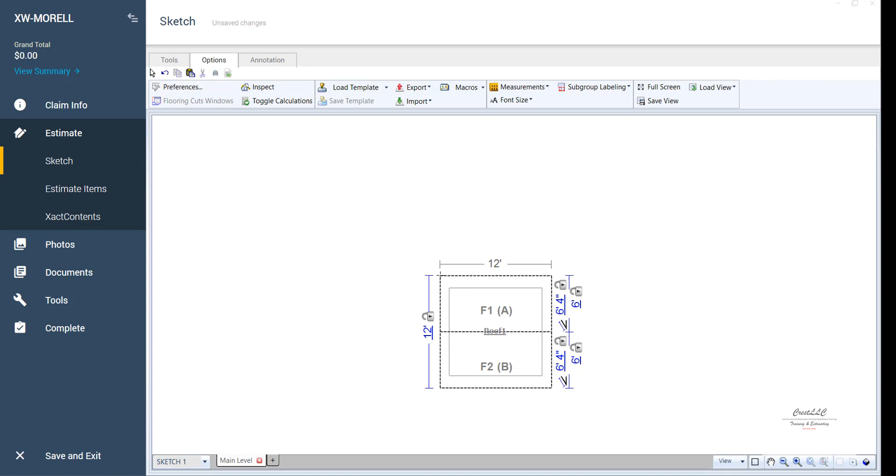So the first thing I'm going to do is hit my F key. If you want to follow along, this is a good exercise for you. So we had a Dutch hip in the front and a hip in the back. I'm going to hit the F key, and I started to rotate it, which I probably need to do. I'm going to hit the tab key till I get to my Dutch hip. There's partial hip, there's my Dutch hip right there.

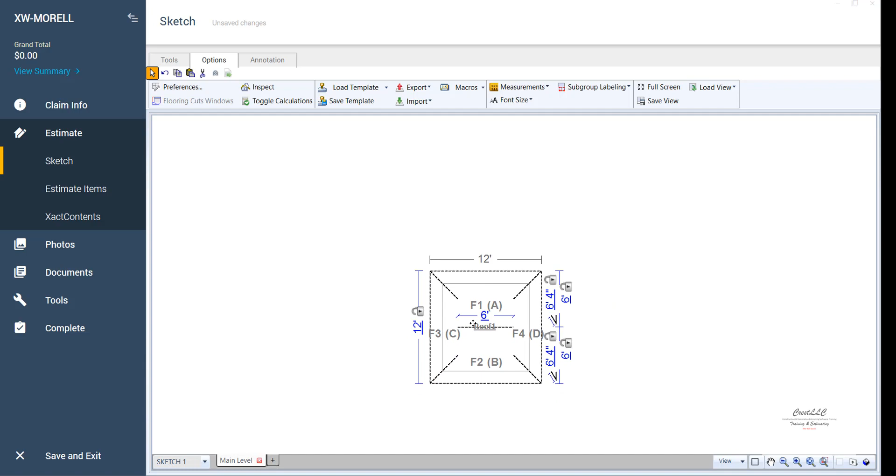So I'm going to go ahead and put it down because it's hard to tell which way is the Dutch, and I can see that I need to rotate it. So I'm going to rotate it like that. And now when I go into my properties, you'll notice I can change one end, but when you change one end, it changes it to a gable. It won't let me put a hip in the back here.

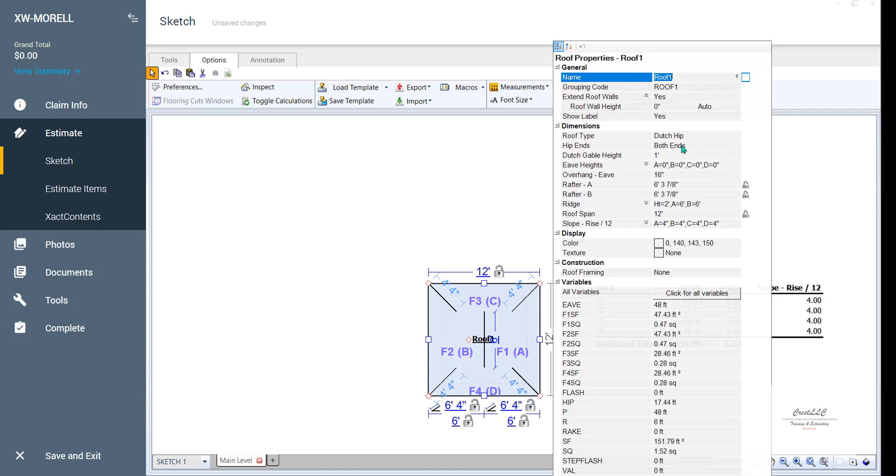So what I'm going to do is tell it to leave the Dutch hip in the front on the D side. You can see it says D right there. So instead of saying give me a Dutch hip on both ends, I'm going to say just give me a Dutch hip on the D end only. And you'll notice how it doesn't let me change the back to a hip. So I've got a Dutch hip with a gable.

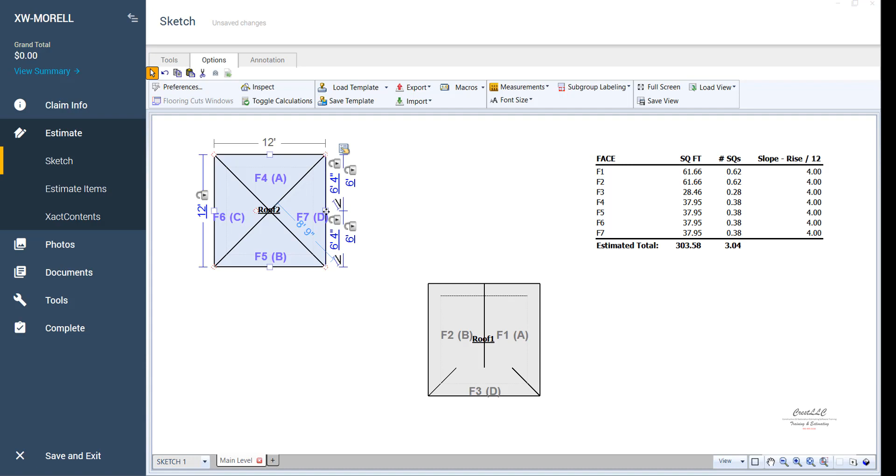So what I'm going to do is put out another roof there. I'm going to go to a hip, and put it down. Remember, you always want to create your hip roofs with the ridge running from left to right so that you don't get that error message. We went over that in one of my previous videos in the level 2. So we're going to pull this right just so that our ridge runs horizontally.

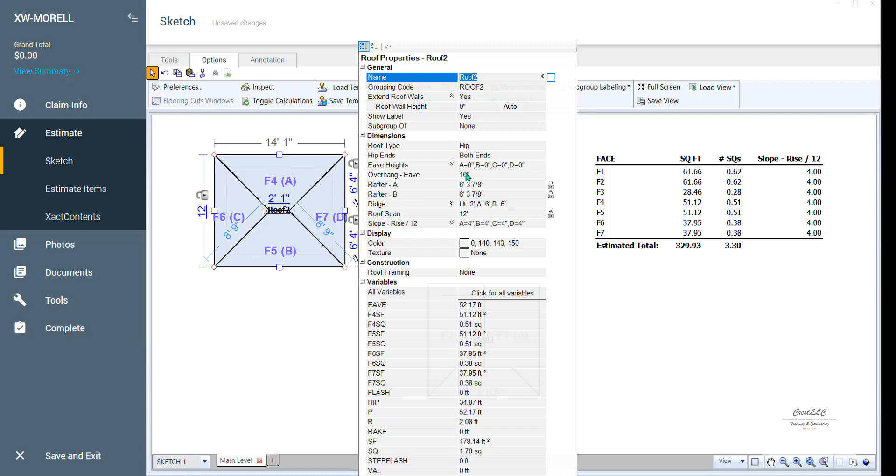And then we're going to again change one side to a gable. So we're going to double click here, and say just leave my, let's say the D end, as a hip. There we go. And now we've got our hip in the back. And now we can combine the two.

So I'm going to click this and make it a little shorter so it fits on the screen there. I'm going to rotate it, going counterclockwise, so I'm going to hit my Shift Tab. And then I'm going to put them together.

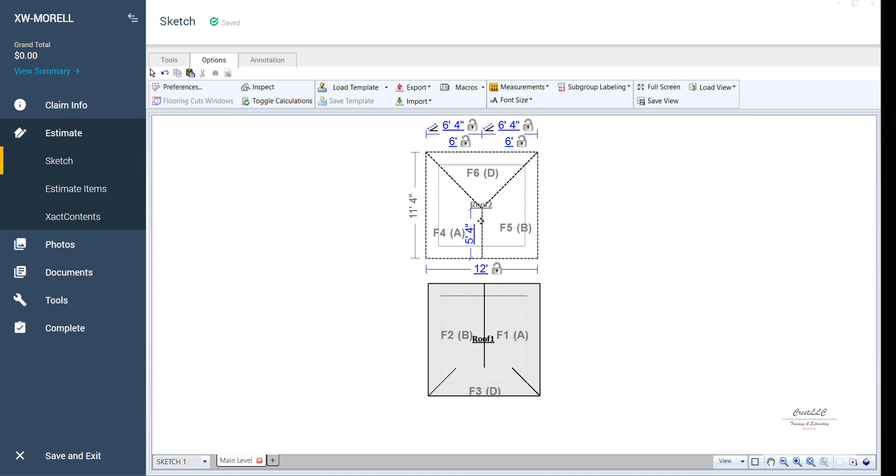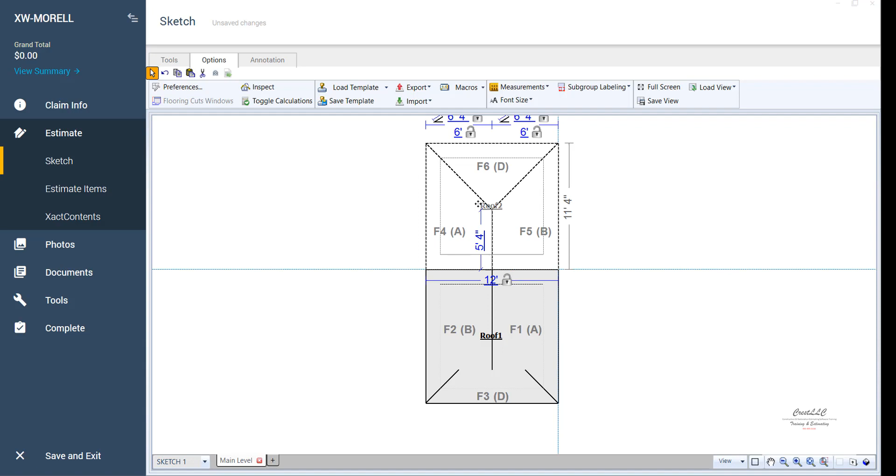And this is a place where you could use that snap line we learned how to use a little while ago. If you hit the S key for our snap line and you zoom in and put that both snap lines right there, see how it snapped right to that corner? Now when I grab this one, it's going to snap right there horizontally and vertically, right there to make one roof. Then I'm going to click on the snap line.

I'm going to delete it, click here. I'm going to get rid of my two overhangs, because not that it really affects anything—you could leave them that way, but it looks nicer if the overhangs are gone.

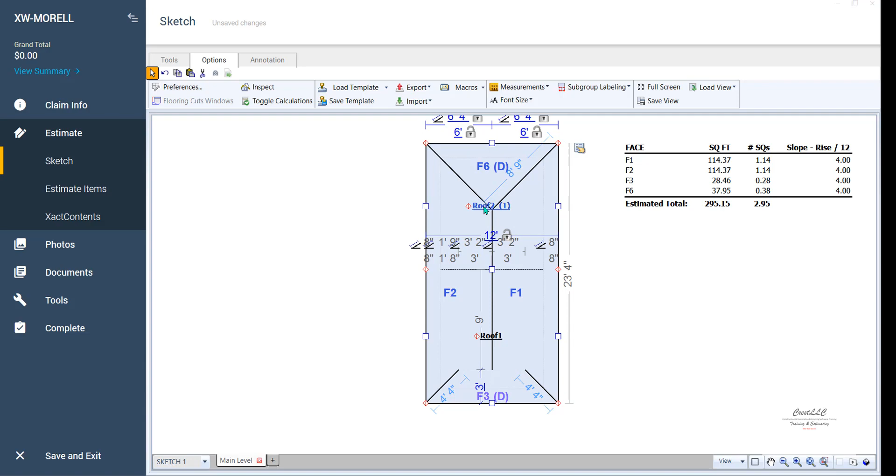And now you take and make one room a subgroup of the other. So I'm going to hit my Control-Shift-C, my shortcut for making a subgroup, and notice it made the back a subgroup here. So now I can double click on there and say hide that label.

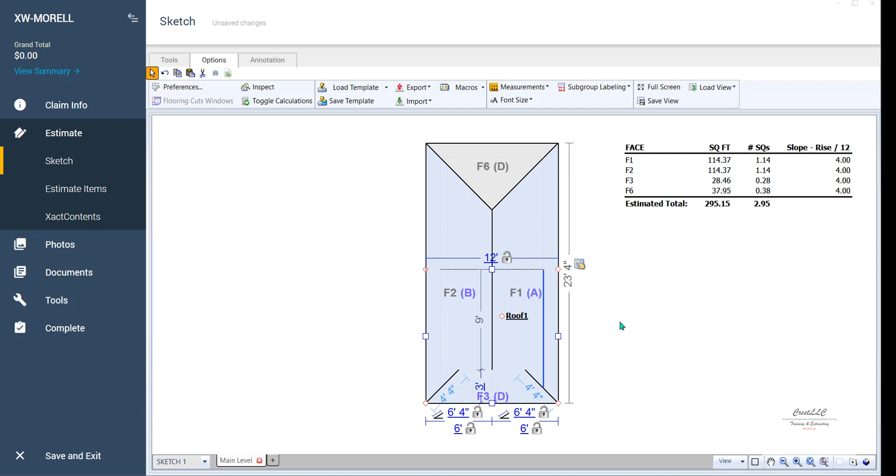Click out of it. I probably want to move my label there, center it a little bit. So I'm going to hover my mouse over the diamond, hit the space bar. Once it turns green, I can move it to where I like. And now I've got two roofs that I turned into one because it's what I needed—I've got my Dutch hip in the front and my hip in the back.

So if you can come up with something that you need that Xactimate won't do, see if it can be broken up into parts, and then just put the parts together.

Now, someone in the comments down below mentioned that they can see the line of the edges of the roofs. He wrote, I've done this, but when I print it, it shows the edges of the two roofs in the sketch report where it does not show in the Sketcher in 3D. I assume he's talking about this line right here, which you can see in the report. You don't really see it in 3D because it's basically one roof.

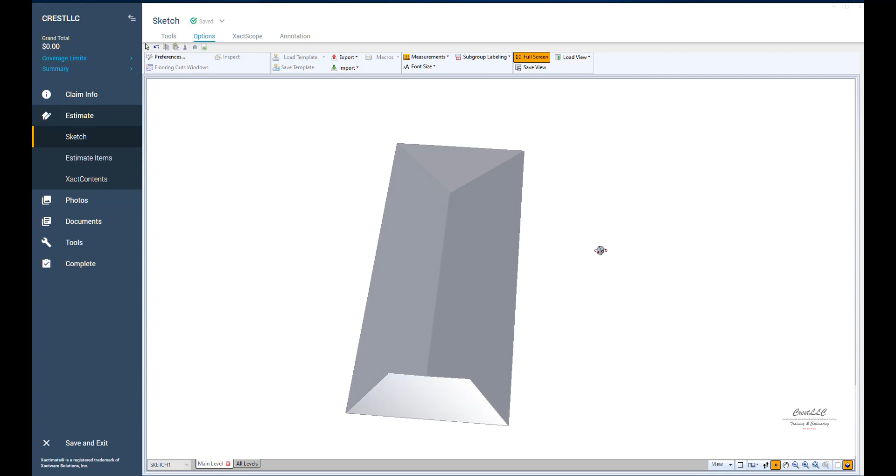Now, if you've drawn it this way, even though you see that line in the report, your calculations here are correct, so that shouldn't matter, but I want to show you what he's talking about and why it's doing it. If I go to the report, I assume he's talking about this line right here.

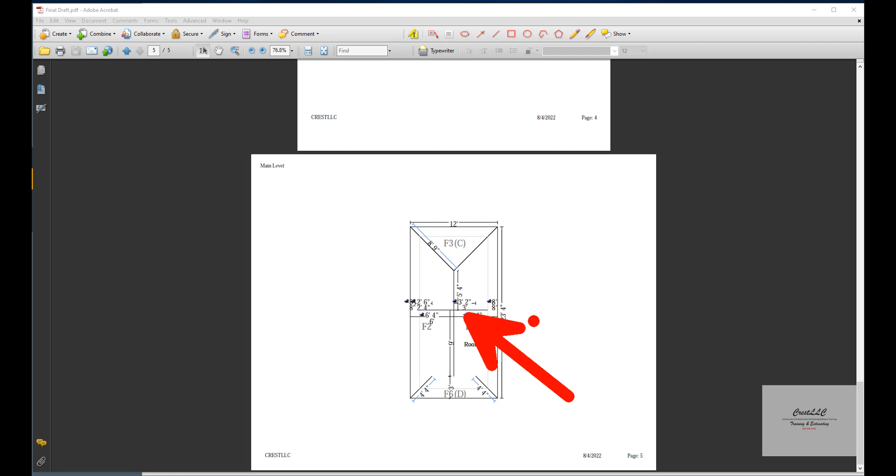And that's the edges of the two roofs. I don't think there's any way to avoid that, but the roof is accurate, the quantities are accurate. I'm going to show you why that line's there. That line really is always there. It's always showing the back of the roof. The reason you don't notice it in other drawings, well, I'm going to show you instead of tell you.

When you draw a roof, I'm just going to take another roof here. I want to delete this one, and I'm just going to draw a simple gable roof here, and put an overbuild right here in the middle.

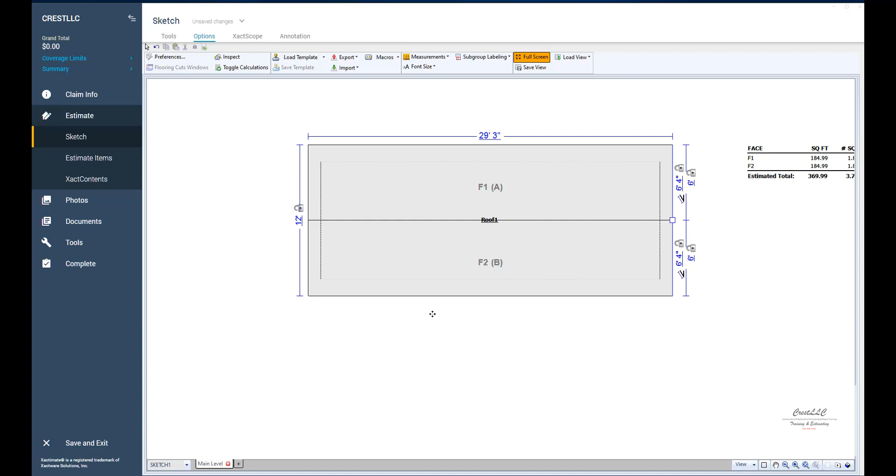So I'm going to break it, click and drag, and create an overbuild there. I want you to notice where the roof is starting. The new overbuild starts up at the ridge. So when I let go, the roof really started right up here. The reason you don't see that faint line is because it's hidden up under that ridge.

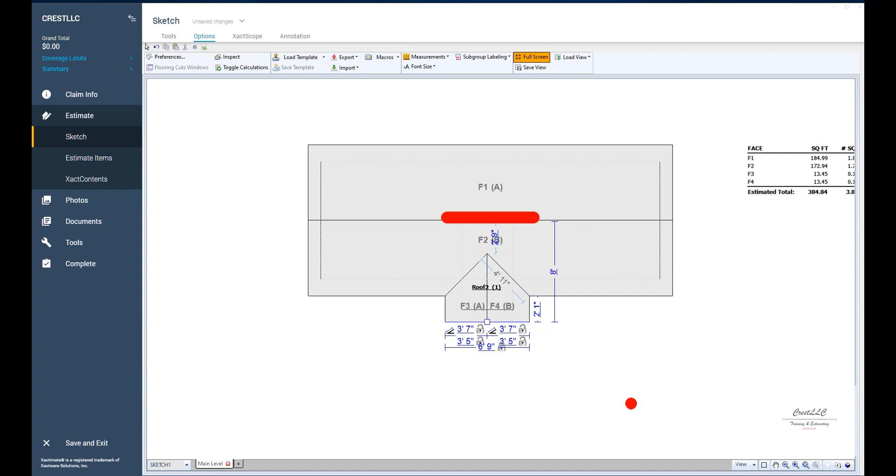Just to prove that, I'll show you, when I click on the roof, notice 3 of the 4 handles are not even inside that little roof. There's one, there's one, there's one, and here's one. And that's because this roof actually does go all the way to the ridge there.

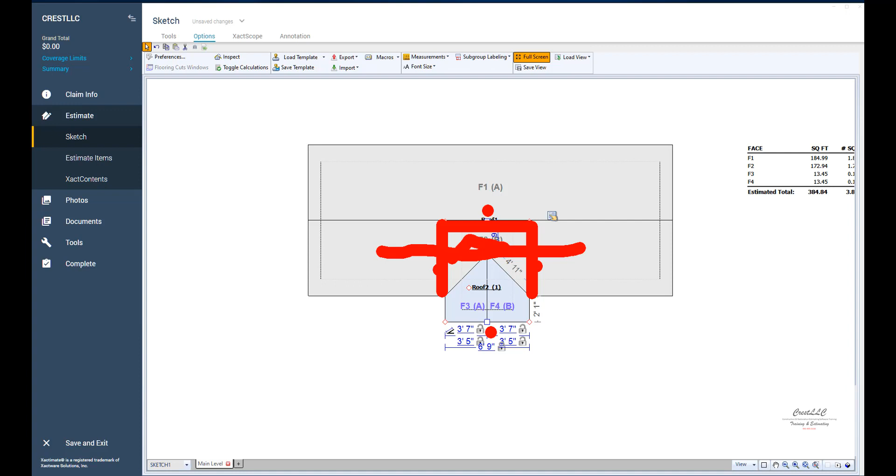Just pretend like this part of that little roof is hidden up under this one. But watch, if I take that top handle and I pull it down, notice the size of the overbuild doesn't change.

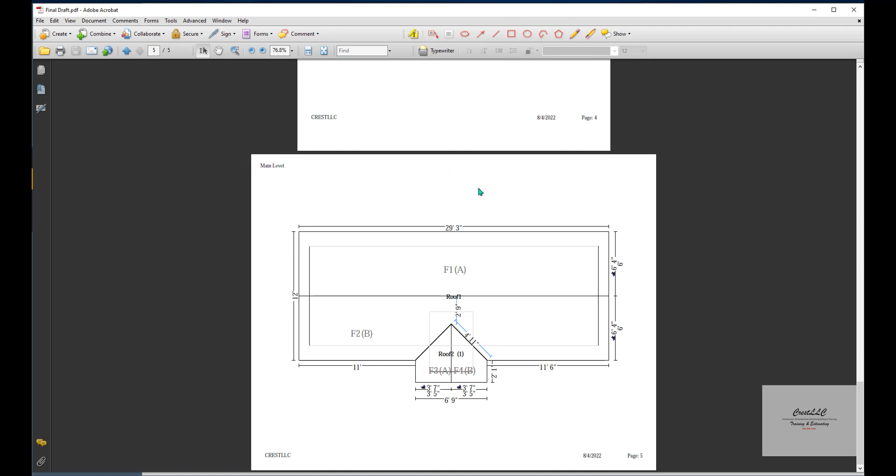But now there's a line here that you're not going to see here on this drawing, but you're going to see it on the report. If I go to the report and scroll down to the sketch, you see the faint line right there? Normally you don't see that faint line because it's hidden up under this one. So you're always going to see the back of wherever that overbuild is, or another roof.

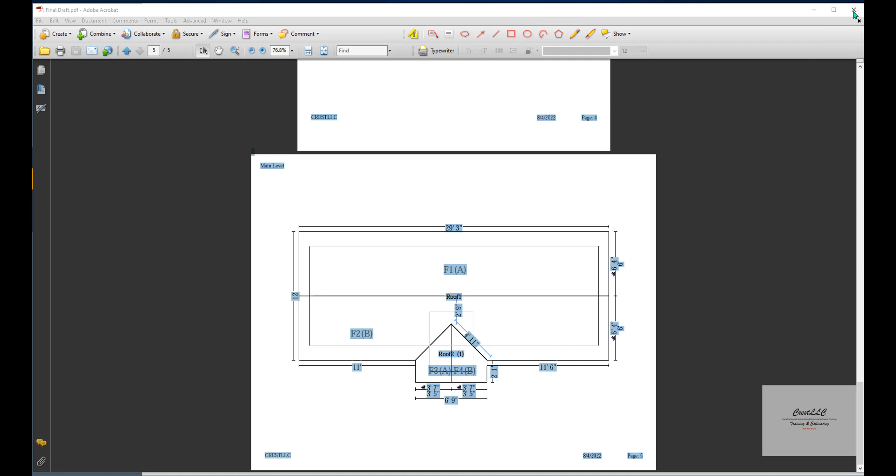So hopefully that explains what he was asking about. Now there is another way to draw this roof, and I'll show you how to do that, but you're still going to get the same effect. I'm going to erase this roof here, and draw that other roof that we were talking about.

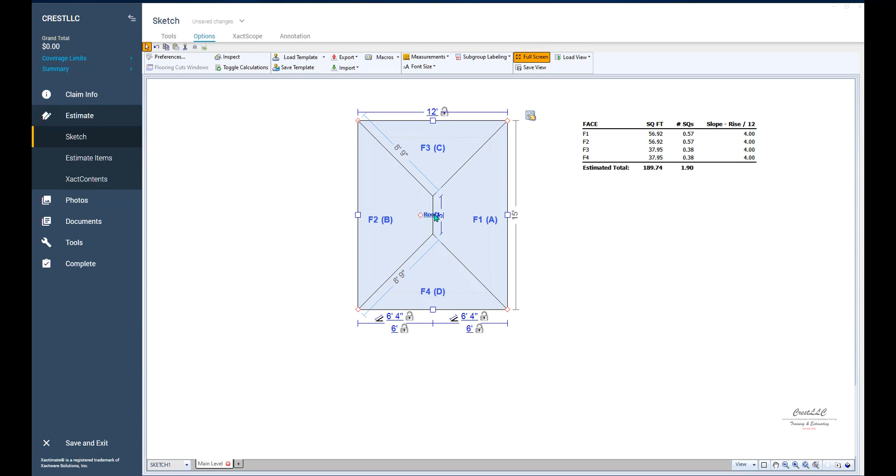So what you do is you just draw a hip roof. And you always want the hip with the ridge running left to right so you don't get that error message. So I'm going to click on it and rotate it, then open up the properties just like I did before, and tell it just to make the hip on the C end.

I'm going to get rid of the overhang down here, and then break this. Now I want you to be careful, because whenever you create, like for example, when I was creating this separately, and I'll do that here, I'll show you real quick.

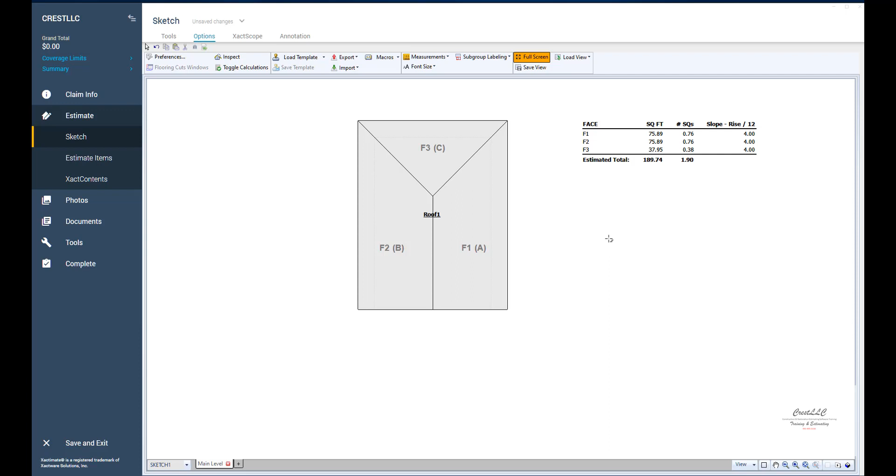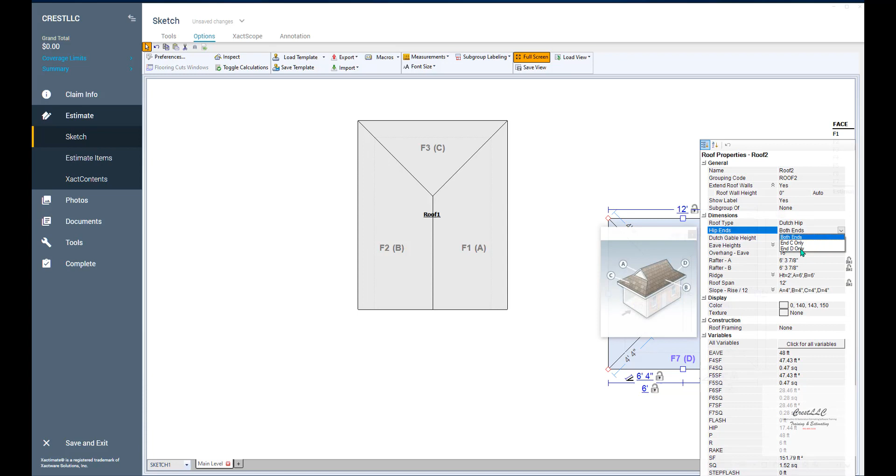When I created it separately, I created a Dutch hip, and then I rotated it, and then said to just make it the D end only. Let me move this over so you can see it a little bit better. So this is, and then I just connected these two.

Now there is another way to do that, but you kind of have to be careful, because once you create the roof, your Dutch hip, if you look here in the properties, this Dutch gable height does not change. So right now this one's at 1 foot.

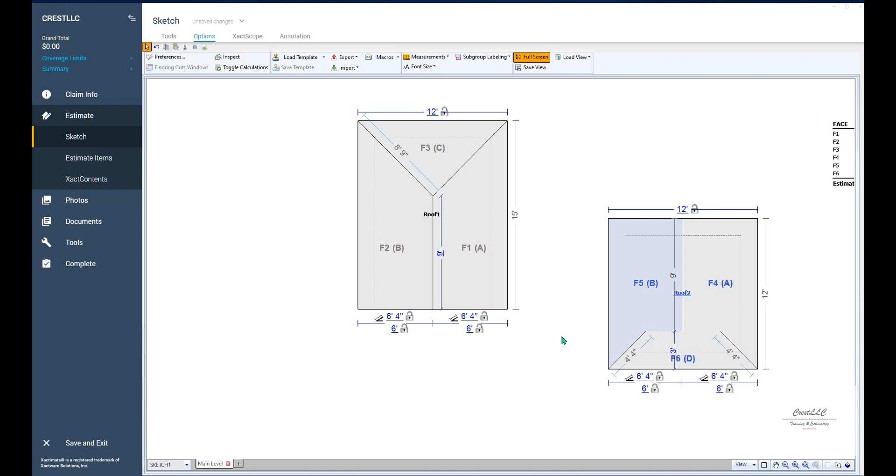So let's say that I come over here and break this anywhere, then hold down my control key and pull that down and create another roof right off of there. I want to change that roof to a Dutch hip. This is another way where you don't have to add on a roof. I'm going to change it to Dutch hip.

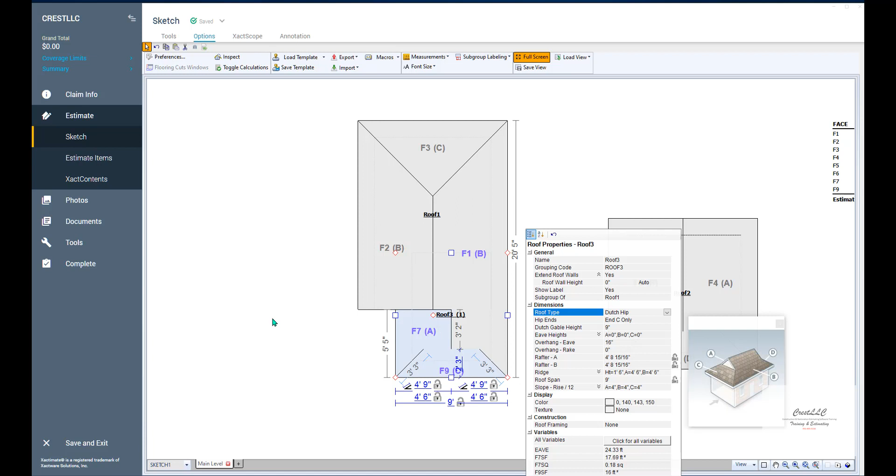But notice my gable height is 9 inches. Now when I expand it so that it's the same size as the other one, let's take a look at that Dutch hip. It stayed 9 inches.

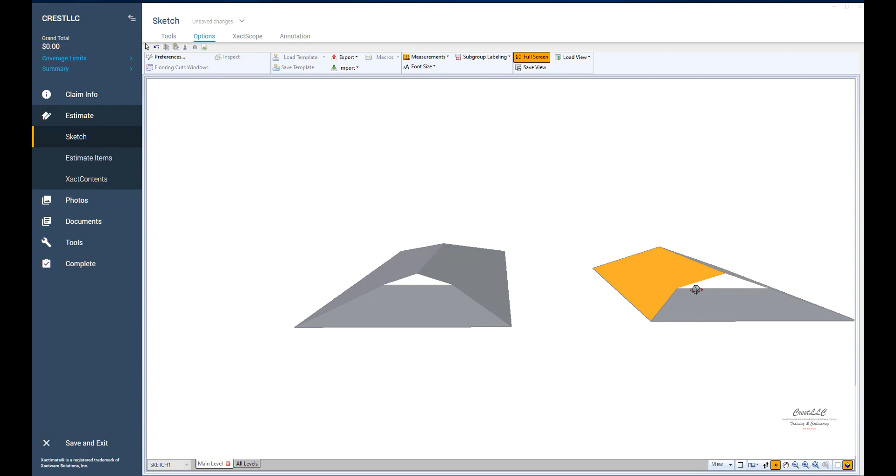And you'll notice that there's a difference in the way they look. See how much smaller this looks than this looks? So regardless of which way you draw it, you need to know the dimension so that you can put it in and accurately draw it.

So you need to know this Dutch gable height right here, and that way, whichever way you draw it, it'll be accurate. But that's a different way of drawing it. The end result is the same, because notice this one, I created it instead of adding 2 roofs.

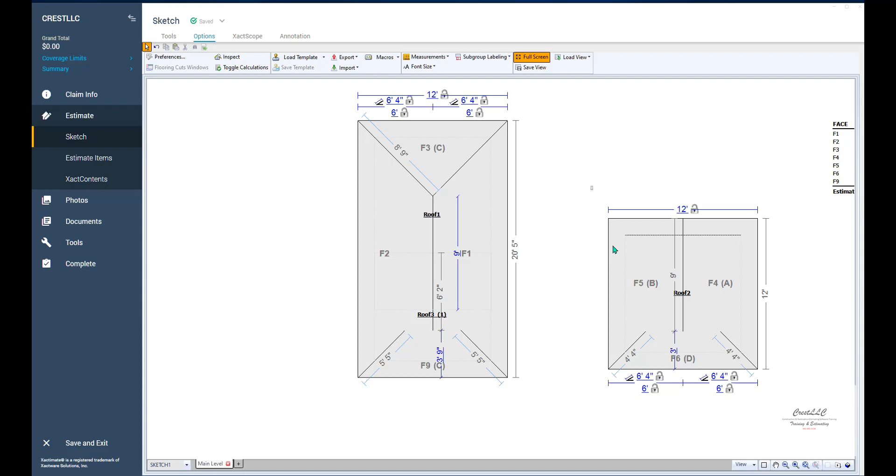Notice here as I hover over it, you're seeing basically the backs of the roofs. So if I want to get rid of that, I could just bring this up to where the other one is.

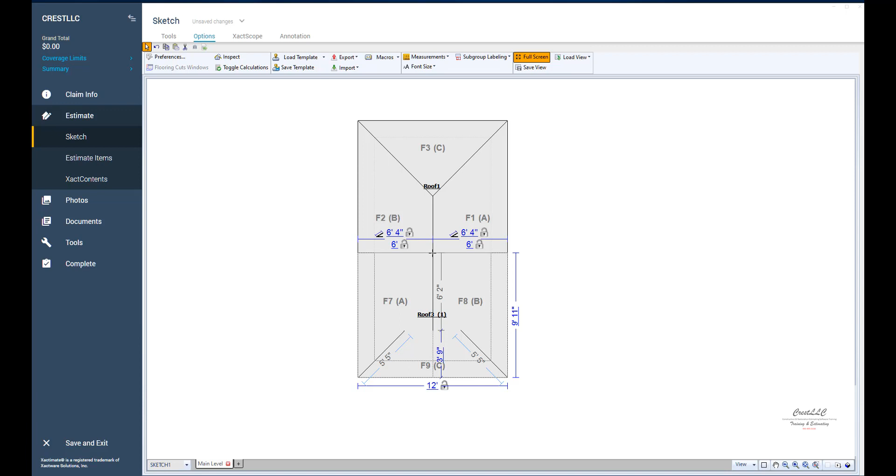You still see that line there. There we go, the lines in now, the two are together, and you don't see them in 3D just like the other way, but you're still going to see it in your report.